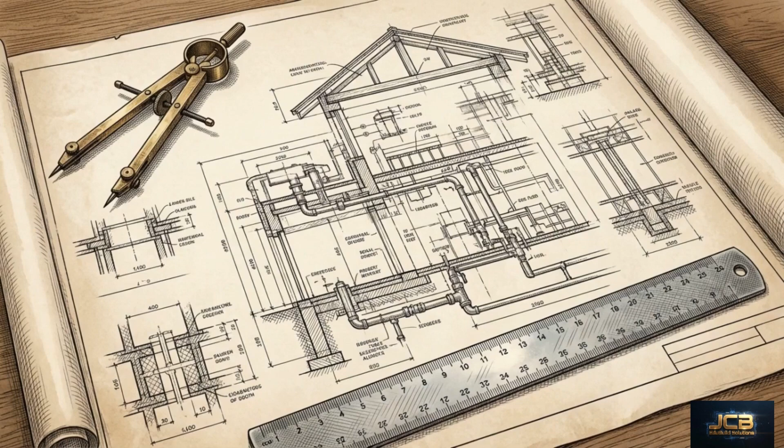As you prepare for your licensure examination, we will be your guides through the exact mechanical verification protocols mandated by the revised National Plumbing Code.

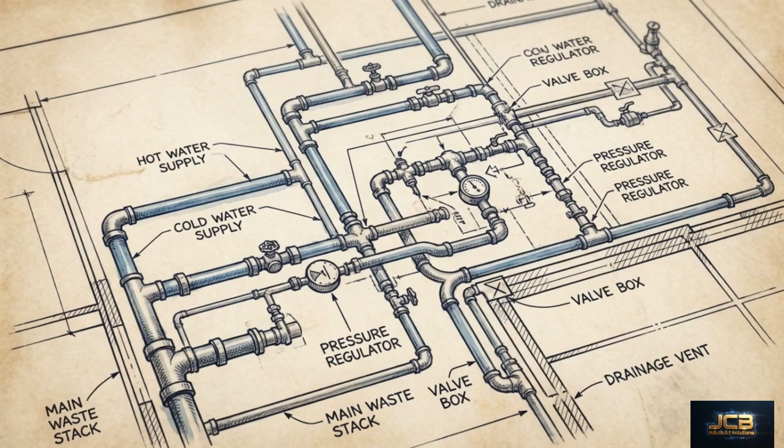When you look at a finished commercial building, the structural shell hides thousands of meters of complex piping. On blueprints, this network is an idealized concept, pure theory. A plumbing system design remains only a theory until it is physically stressed and proven intact.

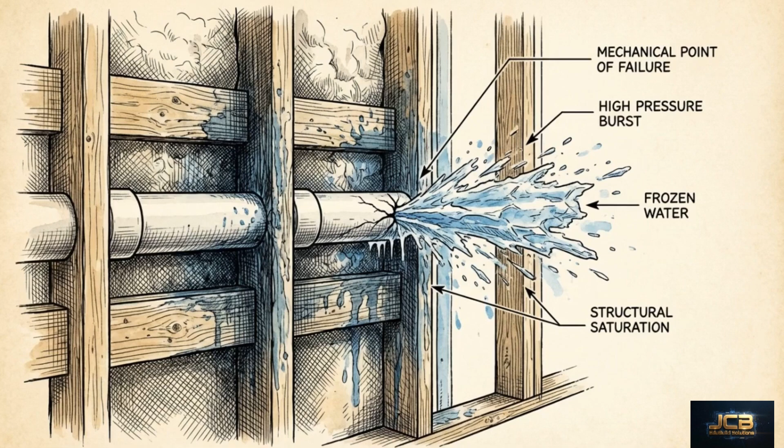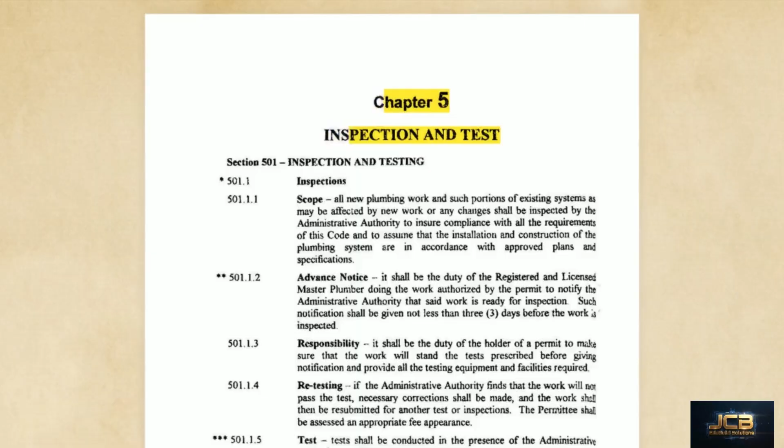Every concealed joint and fitting represents a potential point of failure. If those connections yield under mechanical load, the resulting leaks threaten the structural integrity of the building and the safety of its occupants. Because of this risk, the testing protocols outlined in Chapter 5 of the Code are absolute requirements. They provide the definitive empirical proof required to validate a system's safety before a building can be inhabited.

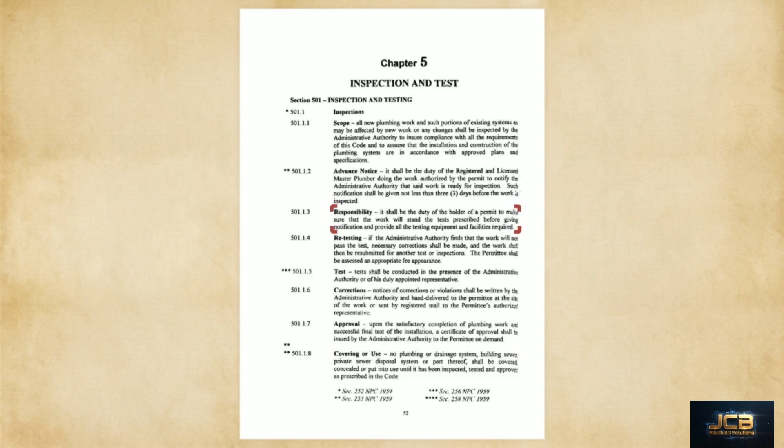This brings us to the prime directive of plumbing inspection: the strict prohibition on covering unverified work. Section 501.1.8 is explicit: no plumbing system shall be covered or put into use until inspected, tested, and approved. Furthermore, Section 501.1.3 states the master plumber must ensure the work withstands these tests and provide all testing equipment.

Physical testing serves as a strict chronological gatekeeper. You cannot advance to the drywall or finishing phases until this empirical proof is secured.

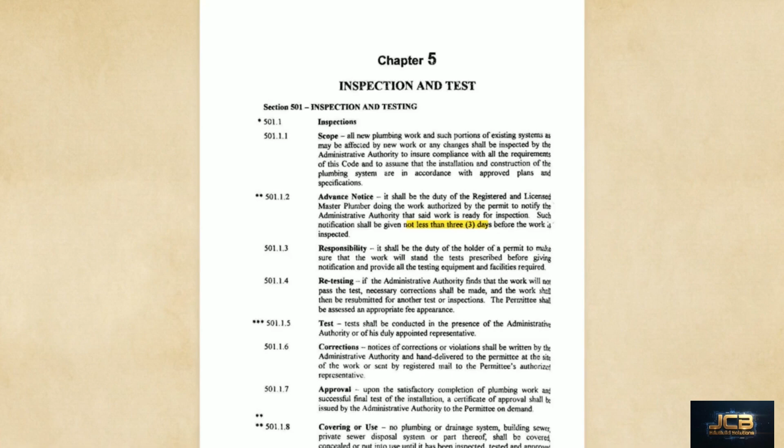Before physical pressure can be applied to the pipes, you must clear the administrative workflow required to initiate a test. The Code establishes a precise numerical parameter for scheduling. Under Section 501.1.2, you must notify the administrative authority that the work is ready for inspection not less than 3 days before the intended test. A technically flawless pressure test cannot result in a certificate of approval if the master plumber fails to satisfy this 3-day notification window.

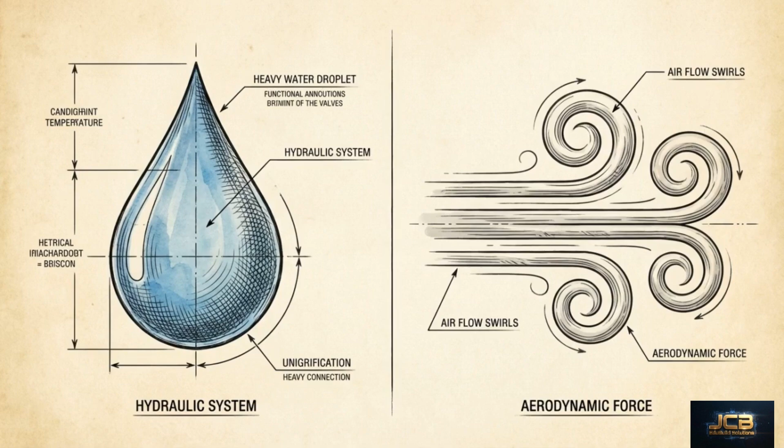Target pressure is just the first step. The water must remain entirely static for 15 minutes, proving zero leakage.

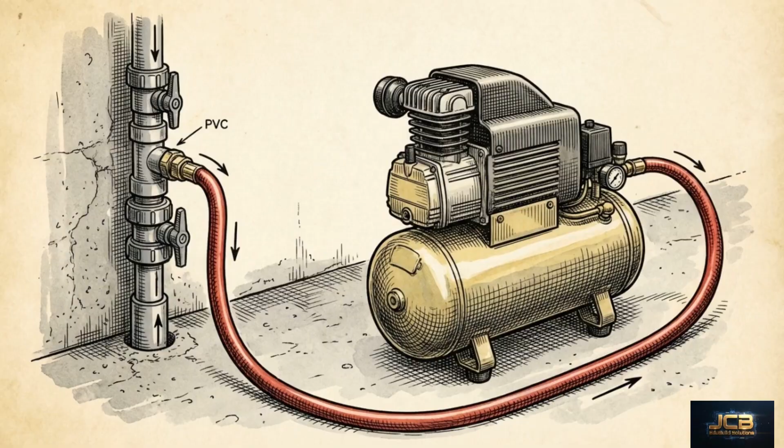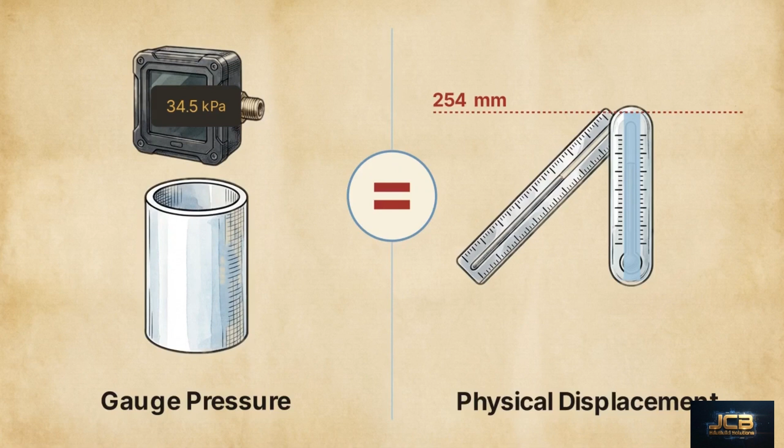If a water test is impractical, the alternative method utilizes an air compressor. The air test requires forcing air into the system until there is a uniform gauge pressure of 34.5 kilopascals. This is sufficient to balance a column of mercury, exactly 254 millimeters in height.

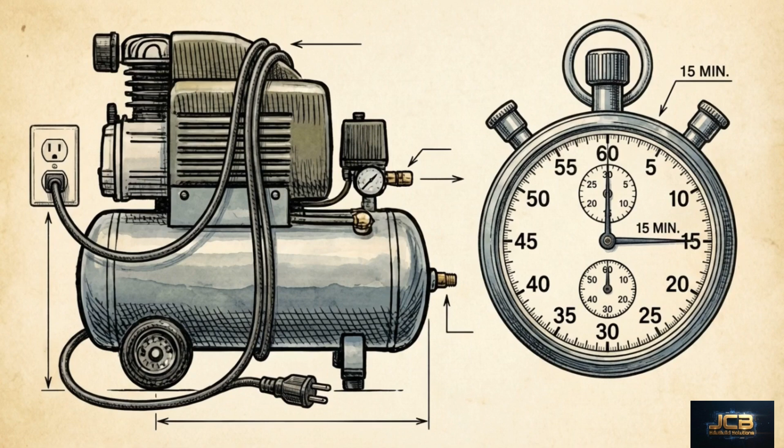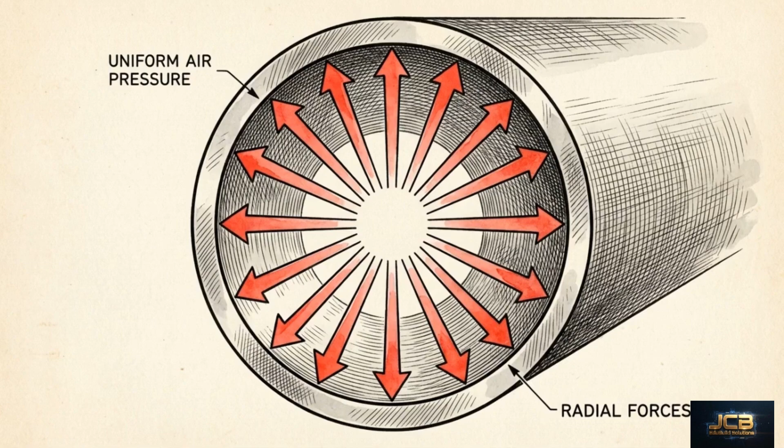Just like the water test, this internal pressure must be held without the introduction of additional air for a minimum of 15 minutes. Whether utilizing the physical weight of a 3-meter water column or the uniform outward pressure of 34.5 kilopascals of air, the piping must sustain the applied stress flawlessly for an entire 15 minutes to definitively prove its structural integrity.

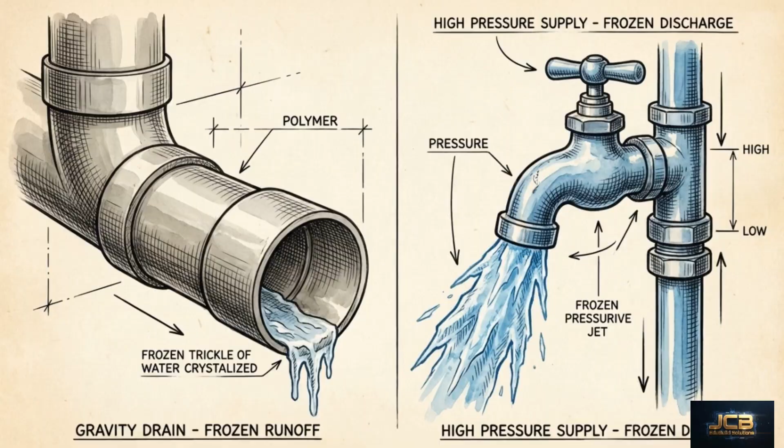Drainage relies on gravity, but potable water supply systems operate under constant internal pressure. Consequently, they demand significantly higher testing thresholds.

This shows a potable water line under stress. The system must be proven tight under a water pressure not less than its working pressure plus 50%. If using air, a static pressure of 344.5 kilopascals is substituted. Either method requires 15 minutes without leaking.

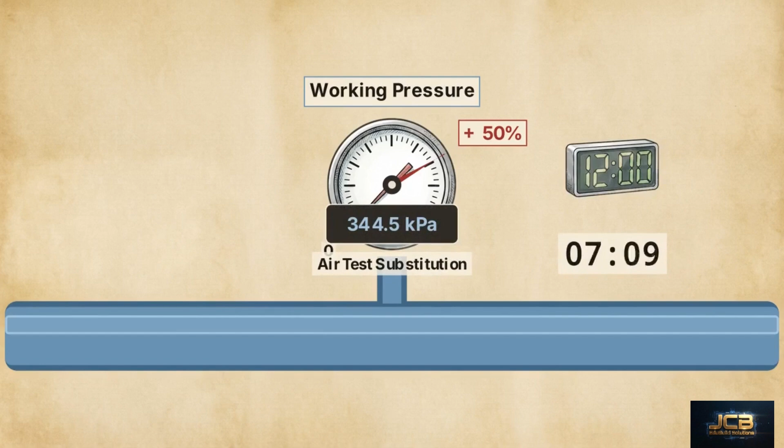Different subsystems dictate specific workflows. For building sewers, Section 501.2.5 specifies plugging the end and filling it with water from the lowest to highest point. Similarly, Section 501.2.10 requires shower receptors tested by filling with water precisely to the rough threshold.

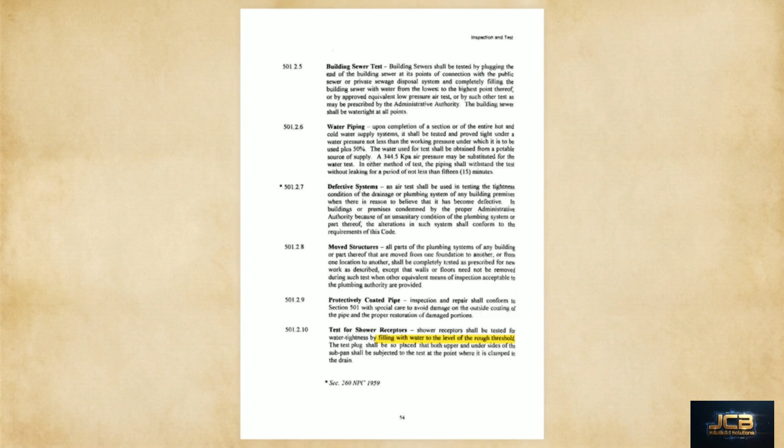Testing protocols are not uniform across a building. The applied pressure and methodology must scale mathematically relative to the intended function and specific risk profile of each subsystem.

Once construction concludes and the building enters its operational life cycle, the requirement for mechanical verification does not end. If an existing plumbing system is suspected of degrading over time, Section 501.2.7 mandates the use of an air test to verify the tightness condition of the drainage or plumbing network.

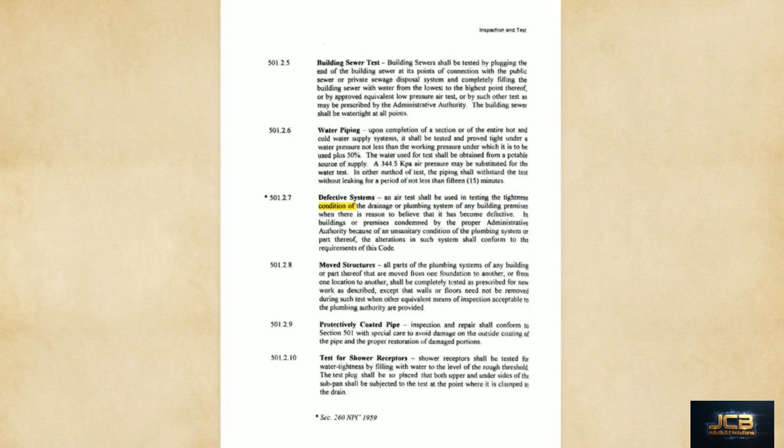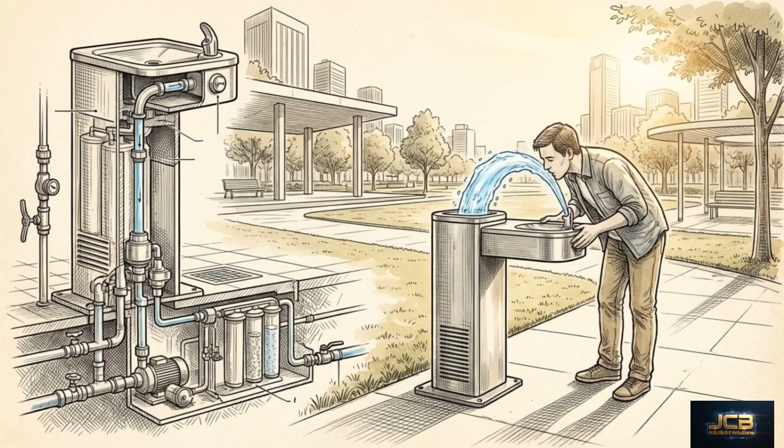When a system fails and creates a sanitary hazard, the property owner bears the legal obligation. Section 504 requires the owner to install additional facilities or make necessary alterations to alleviate any dangerous or insanitary conditions. The code establishes system verification as a permanent obligation to public health that persists long after the initial construction is complete.

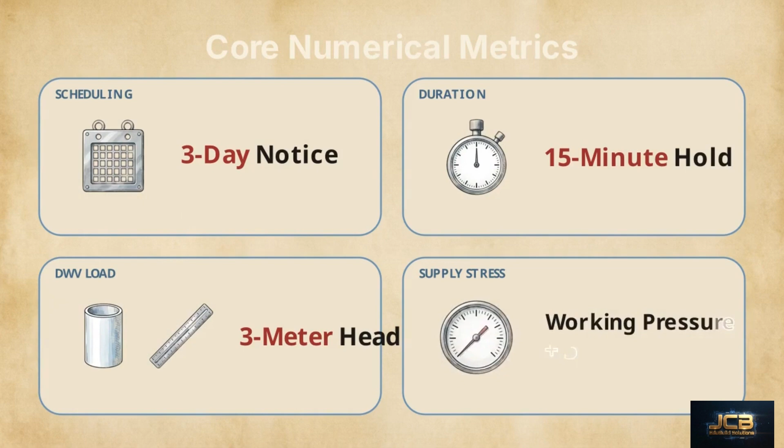This infographic isolates the 4 exact numerical metrics you must memorize for your licensure examination: the 3-day advance notice, the 15-minute hold time, the 3-meter head for DWV, and the working pressure plus 50% for supply lines. Applying these exact numerical parameters represents the professional standard for every registered master plumber.